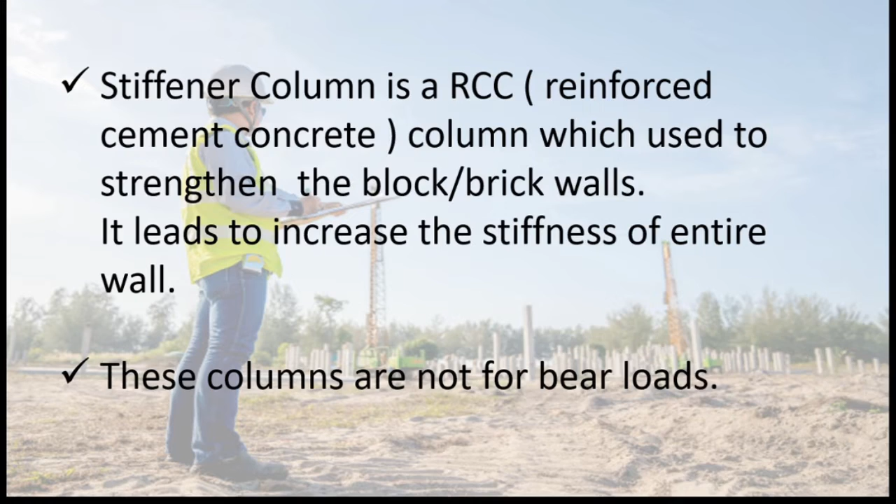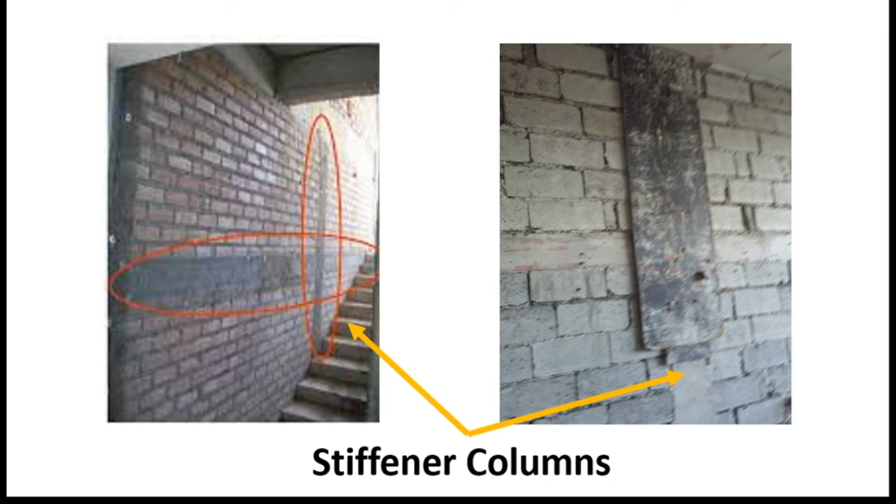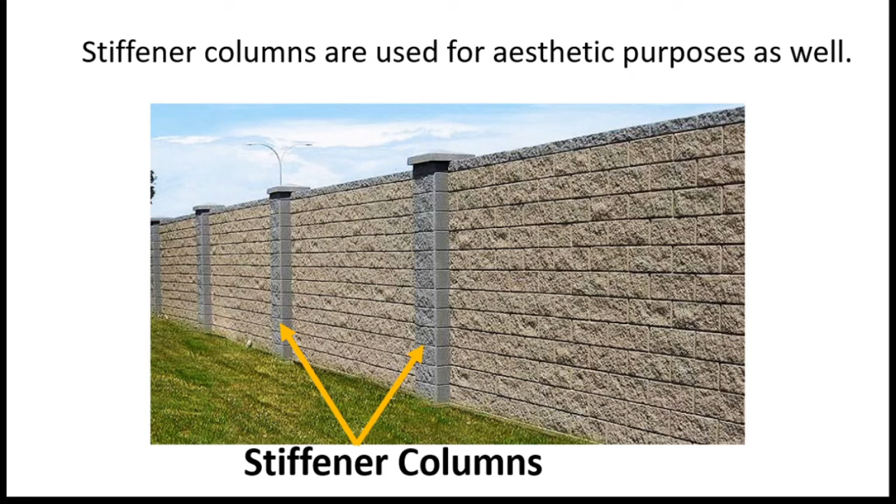You can see the stiffener columns in these pictures. Vertical ones are the stiffener columns. Stiffener columns are used for aesthetic purposes as well. As a practice, we normally construct stiffener columns at 10 feet intervals.

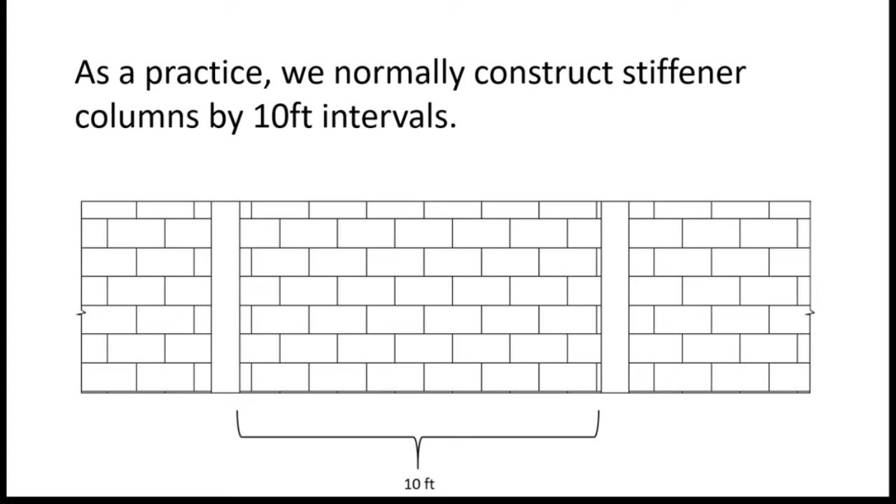For this type of wall, you can use reinforcing bars as shown in the figure below. It shows 2 bars of 10 mm diameter tor steel for main reinforcement and 6 mm diameter mild steel bars at 200 mm spacing for stirrups.

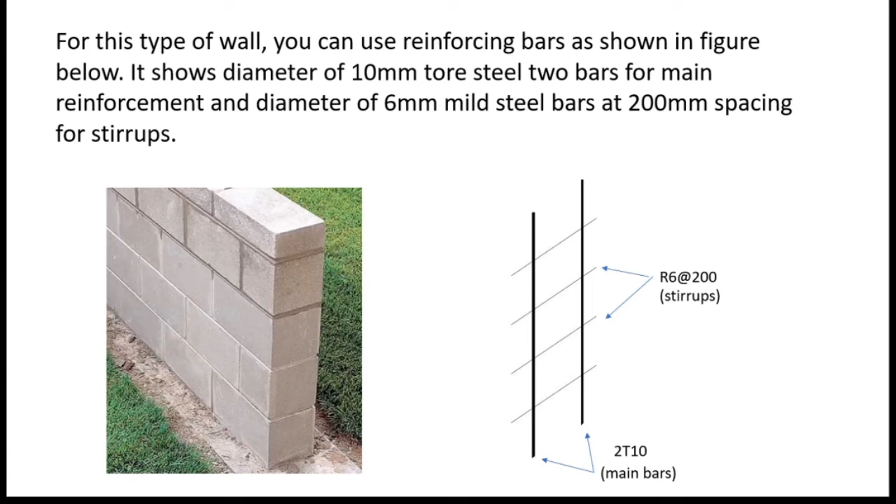Please note that all the above reinforcing details are given by experience at construction sites. If you are given specifications by an engineer, you must follow those guidelines. But if you don't have guidelines, then you can use the above reinforcing details without hesitation.